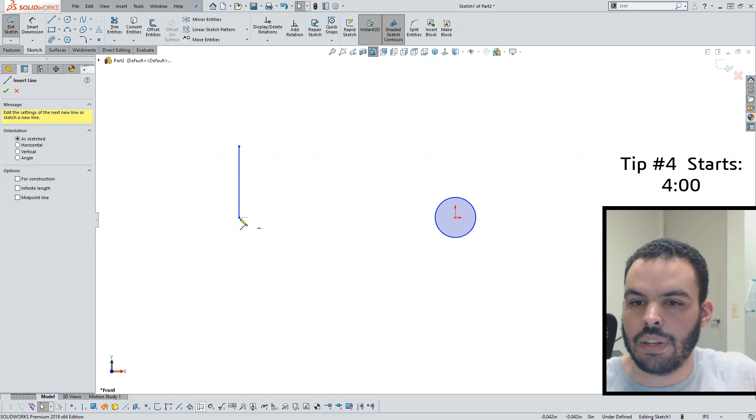So that also goes for sketch geometry or sketching in general. So let's begin a new sketch here. Sketch on the front plane, for example. So let's get a circle right there. And let's suppose that we have a line out here. It's got some height. And, all right, maybe that goes straight there. And in the prompt, they'll draw a line like that, and they'll point to where this contacts here, and it'll have the little tangent symbol. So that explicitly means you need to add a tangent relation there.

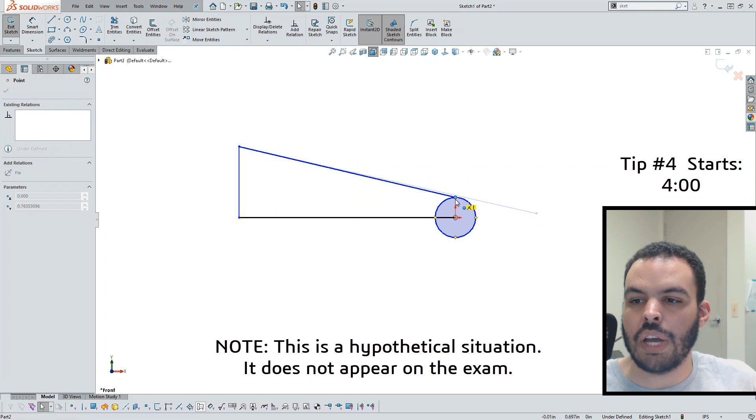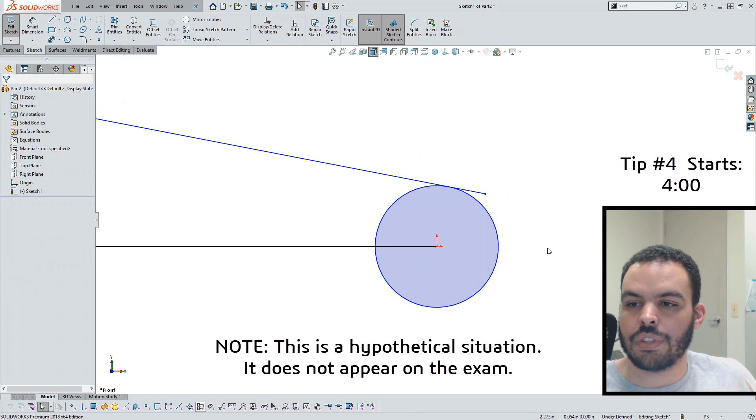So don't be tricky and try and assume that, oh, if you drag it onto one of those quadrant points that's correct. As you'll know that if you have this as a slope, the tangent point's going to be a little bit out to the right. So you're actually messing yourself up a little bit by adding this extra relation. So if it asks for a tangent relation, give it that tangent relation, just like that. So number 3, don't assume anything.

All right, so for number 4, and this one is really important, don't be afraid to spend a lot of time developing a robust parametric model for the first question. At first, it's going to seem like you're spending a disproportionate amount of time on that first question, but this is normal. Since the first segment of the exam is all about modifying the components you have created, the subsequent questions will come pretty quickly, provided that you've created your part correctly.

So, for example, when I took it, I spent 30 out of 90 minutes on the very first question, but still finished with plenty of time to spare. Keep in mind, this does not mean you must spend 30 minutes before you move on, just that it's good to invest time into that first part.

For number 5, and I stressed this in my CSWA video, don't move on from a multiple choice answer unless your answer matches exactly. The multiple choice questions on the CSWP are your canaries in a coal mine, pretty much.

If they don't match up, something is wrong. I know firsthand how tempting it is to move on just because your answer is so close. It happened to me. When I first finished modeling my first question, my mass was about 3 grams too heavy when compared to one of the answers. I made some changes, found a mistake, and now it was 5 grams too light.

So at this point, I just kind of wanted to move on. But keeping with my discipline really paid off for me. I kept looking and I found my last mistake. And then my mass was practically an exact match. Less than 1/100th of a gram of difference.

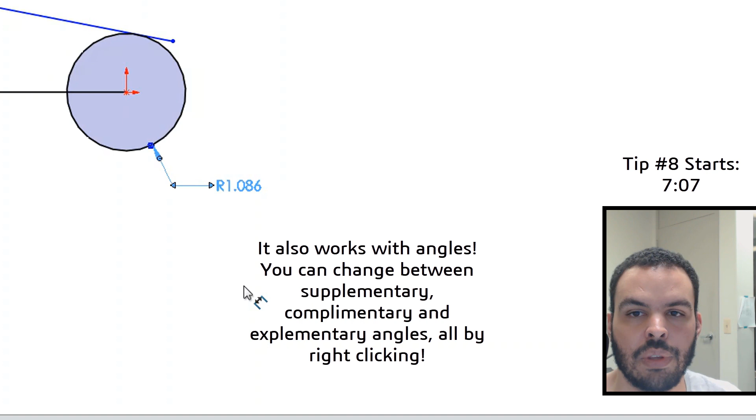So as you can see, when I throw down my dimension, since it's a full circle, it gives me the diameter dimension. Well, you can change this to display as a radius. So right click, display as radius. And this helps you cross-check between the drawing that you're given and your model. So you can quickly scan it. Yep, those numbers are the same. I know it's simple math, but these exams can do some pretty weird stuff to your brain, and it's best to leave the simple math to SOLIDWORKS.

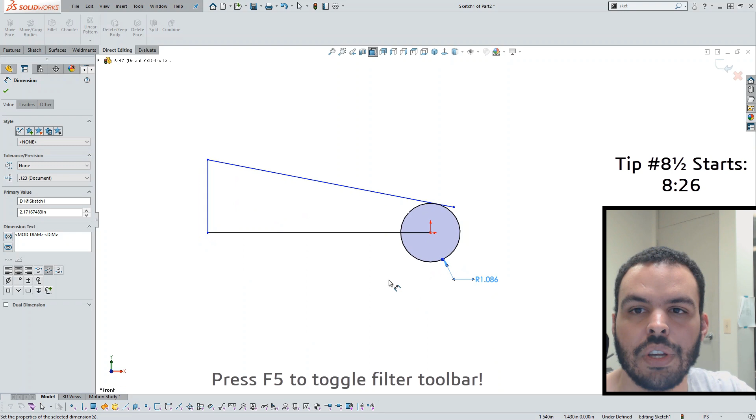Alright, so let's move on to the next tip, tip number 8. Use any speed techniques necessary. This includes keyboard shortcuts, selection filters, mouse gestures. You see if I right click and drag, I have my mouse gestures set up. Using the shortcut bar, by default by pressing the S key, makes things a lot faster. The important thing here is don't go into the exam with a very fresh setup made just the day before, because that's just going to slow you down as you try and find out where everything is.

If you can't find a command, don't spend time looking for it. SOLIDWORKS has a search function built in, up here on the top right. Usually it's set to SOLIDWORKS help, but if you hit this little drop down next to the magnifying glass, you can switch it to commands. And then you can type in the name of a command and have it instantly show up.

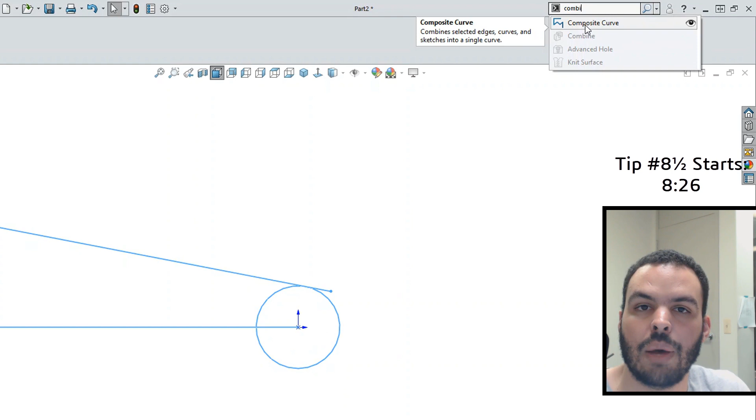Use this. So the nice thing is, if you press the S key, you see it highlights. You can actually start typing into that without having to mouse all the way over to it. So that's another quick tip. So S, and then you can type in some command.

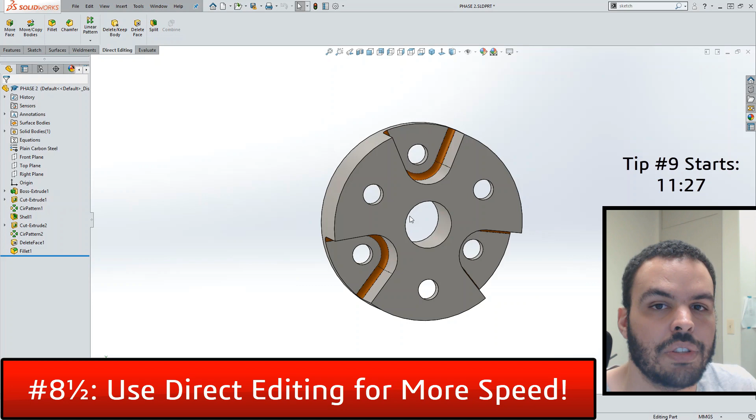This next technique is kind of like a half tip because it all rolls in with the speed techniques, but you can use direct editing to your advantage on these exams. It's one of these tabs here. So you right click, direct editing's right here, and you'll get these tabs. These are tools that are used to modify imported geometry that has no feature history. One of the most powerful commands here is delete face, and I'll make an entire video about this, but I'll show you some of its power right here.

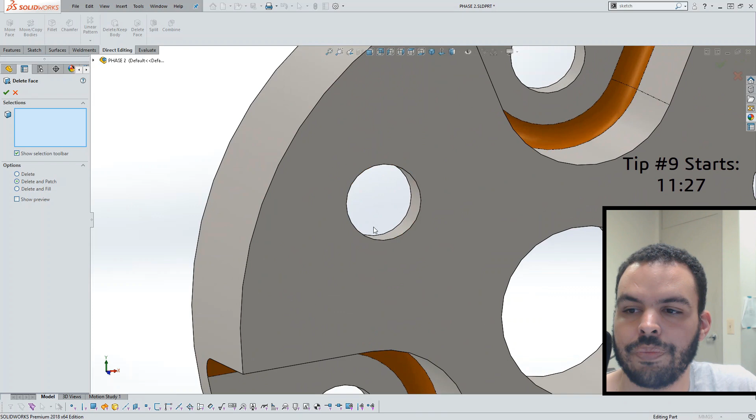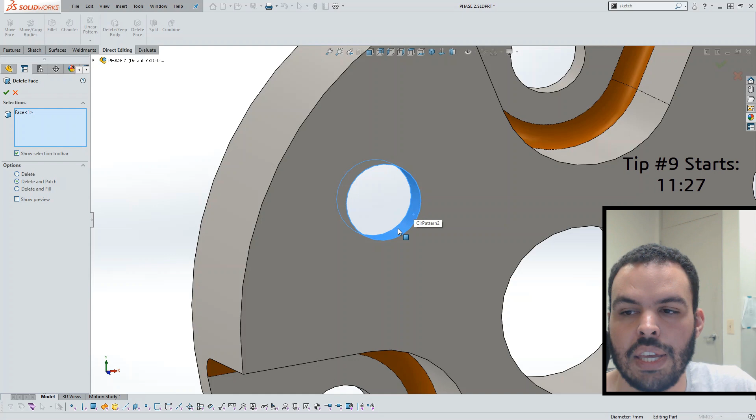So I'll launch the delete face command, and there's this option for delete and patch, and I'll show you what it does. So let's zoom into this hole, and let's say I don't want this hole. If I delete this face here, you'll be left with a vacancy, and with delete and patch, SOLIDWORKS will try and fill it up. So what does it fill it up with, you ask? With surrounding surfaces. So basically it'll take out that inner cylinder and then patch it up with all this flat part next to it. So the result is that it erases the hole.

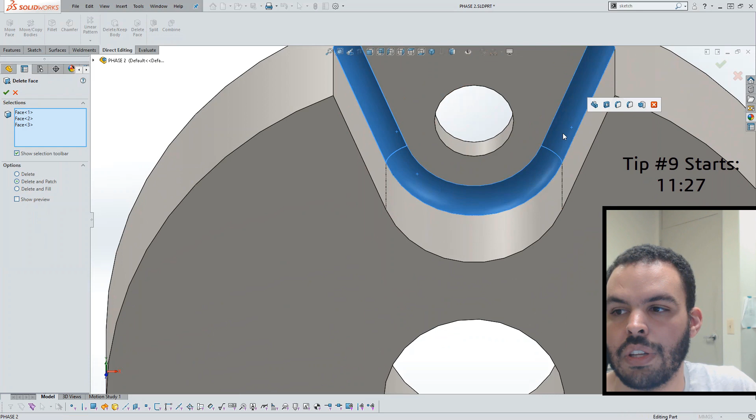And this is insanely powerful. Another thing you can do is erase fillets with it. I'll show you that here. Delete face. You can select the faces of the fillet, hit OK. There, like it never even happened. And this happens so fast too.

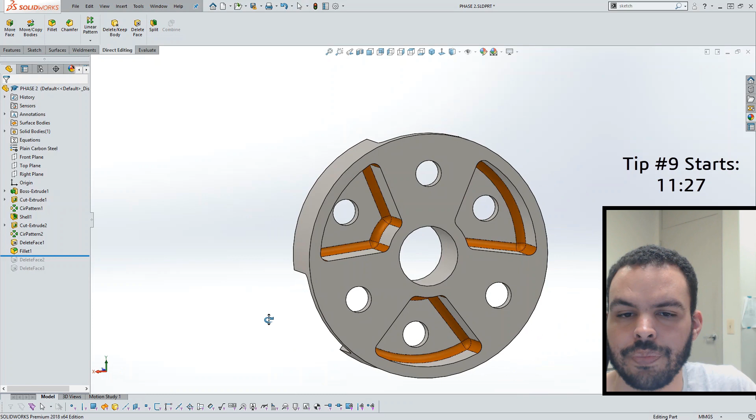And it can especially help with questions where it's being tricky with your relations and your dependencies. So let's say that I modeled this part, which is the Model Mania part, by the way, from 2017, I believe. So you can see that there's a couple of circular patterns here. So let's say that I modeled this whole thing, and then one of the changes it wants me to do is to remove this top pocket and leave this bottom one.

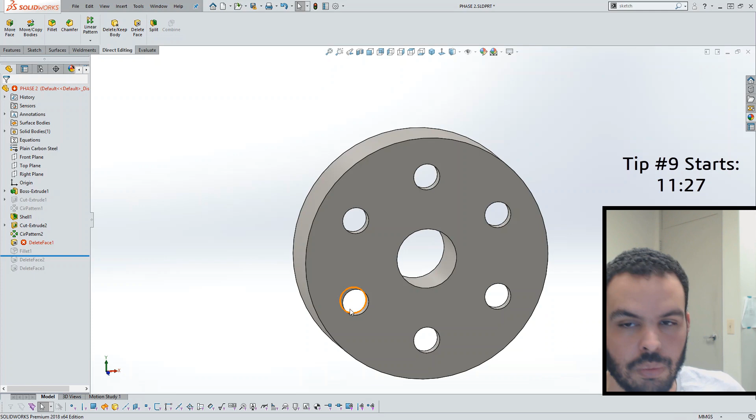Well, I can't really delete it or suppress it because if you see, first of all, it causes errors, but it also takes the other pockets with it. So let's see what delete face has to offer us. So if I go delete face, right click, select tangency, which selects all these faces here, hit OK. Boom, done. So as you can see, this is a pretty powerful tool, but I will tell you about one caveat,

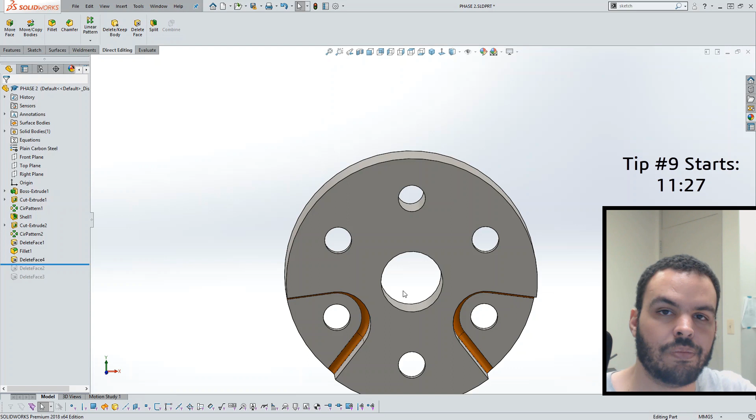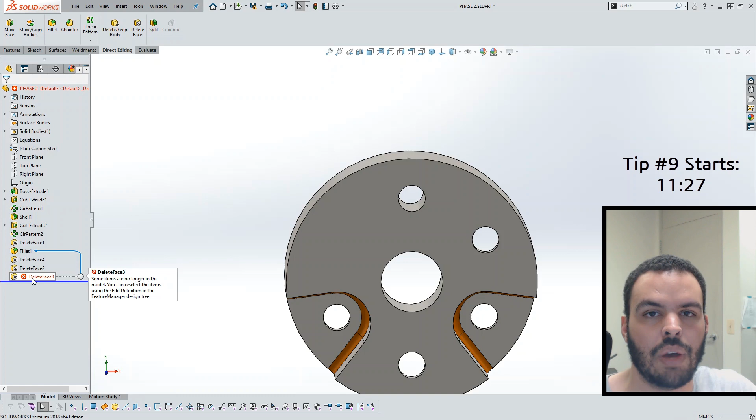and this is why I don't recommend that you use this in the workplace, in a production environment. It can make your part difficult and confusing to pick up by other people who don't know anything about surfacing or what the direct editing tools are. So when making changes in the workplace environment, I would go edit the history. But in a speed setting, delete face is pretty good.

So for number 9, save the part after every question. Doing this has two main benefits. If for some reason you need to reach out to the SOLIDWORKS certification team with a question regarding your exam, they're going to want to see the model as it looked at that particular question. So if you save after every question, you'll have that readily available for them.

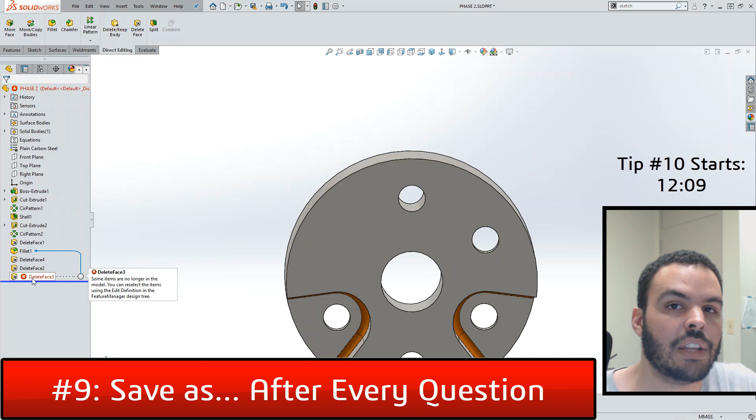Another thing is that if you fail the exam, hopefully not after this video, but if you do, you can review your old models and maybe pull out some mistakes and see what you did wrong. But another thing that it does is basically what I'll talk about in my next tip. So tip number 10, use reload. So what is reload? Reload is basically a very fast way of closing and opening the part without saving.

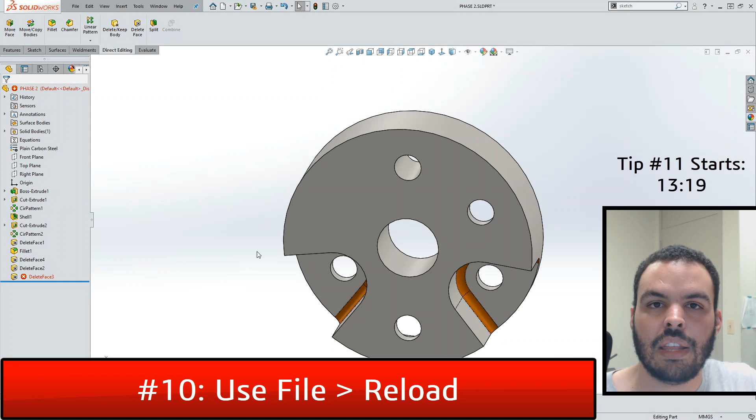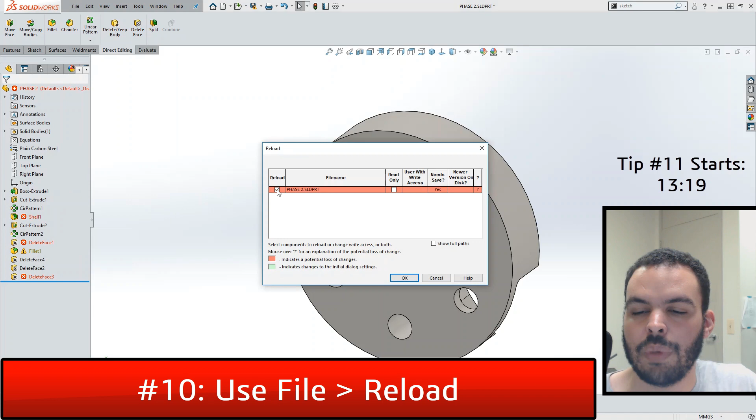So as you can see with my poor Model Mania part, I've wreaked havoc on it with this delete face command. And let's say that I do that by accident, or I make some change that is so subtle that I didn't really know that I did. So maybe I took that shell by accident and expanded it out, even more errors. And you just kind of want to go back to the part as you saved it from the last question. Go to File, Reload, make sure that's checked, hit OK, and boom, you're back to your last checkpoint.

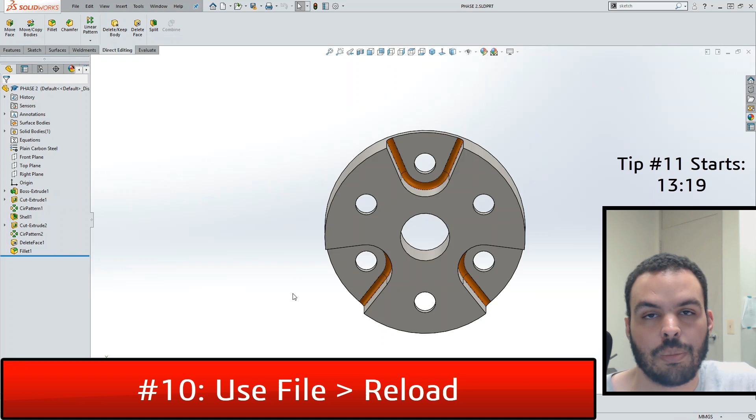So that's also very powerful functionality, but it's only contingent on you saving those parts. So if you're not saving those parts, it'll send you back to the last time you saved, which can be pretty far back if you're not diligent about it. So use it with caution, but it's a pretty powerful technique as well.

So for tip number 11, and this will be news to some of you, if you don't know how to use a particular feature, just Google it. I'm serious, there's actually nothing that says you can't do a little bit of research during the exams, either from the internet or from training manuals. Keep in mind that if you're underprepared, no amount of Google searching will save you. The exam is timed, so if you have to look up every single feature, you're not going to finish.

And also, this tip only works well for very low-level specific questions, like how to use a coordinate system rather than how do I use multibodies. I could make an entire series on multibodies. It's just too broad. Finally, my last tip is that if you feel like you have to hack the question to accomplish a task, you're probably doing something wrong.

So for example, if you tried to add a mate during the assembly portion and it fails to add, it's very tempting to think, maybe the exam is wrong? I can make it work if I relax this arbitrary constraint. Don't do it. It's a trap. Read the question again and check your work. They have checked and proved that these exams are completely correct, and hundreds of people are passing every day, including myself, who has passed this 100%. Trust the exam, and if you find a roadblock, check your work.

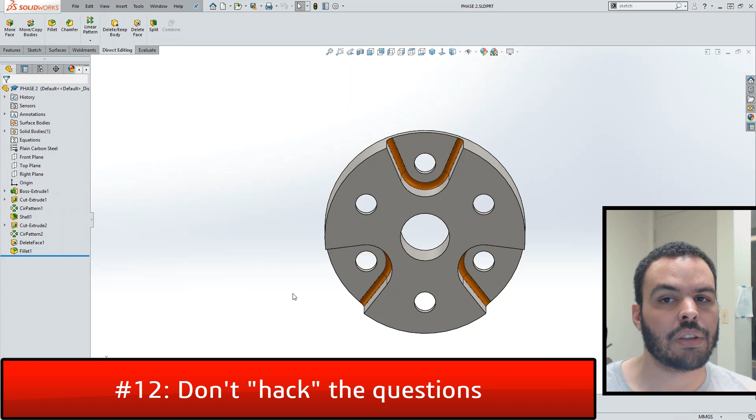So that's pretty much my tips for passing the new CSWP.